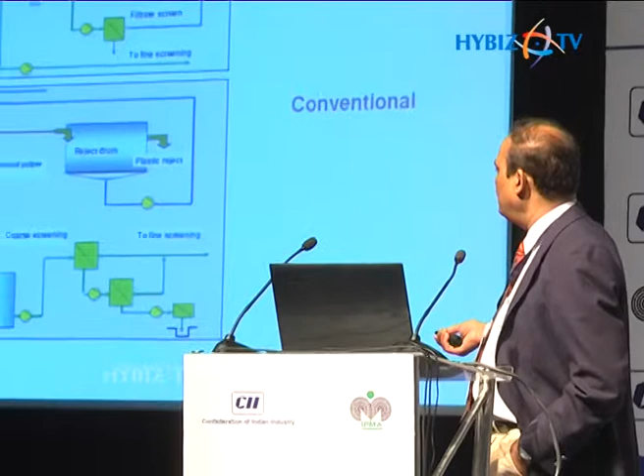The other portion, which basically contains a lot of larger size light impurities, is fed to a secondary pulper where the remaining slushing takes place. The recovered fiber is taken back to the pulper, and then the light rejects go to a reject drum for washing and fiber recovery. And the filtrate is again recycled back to the system.

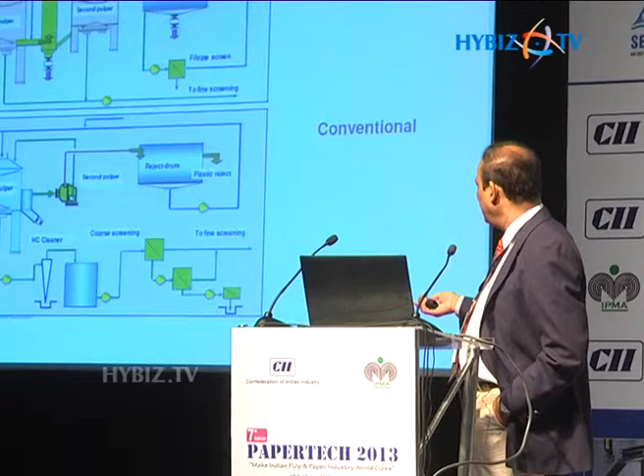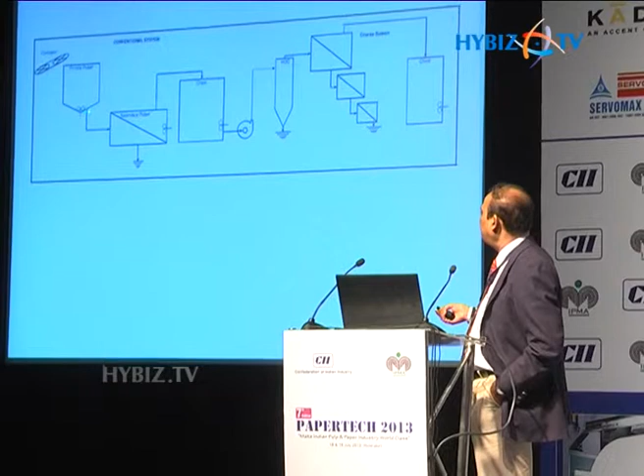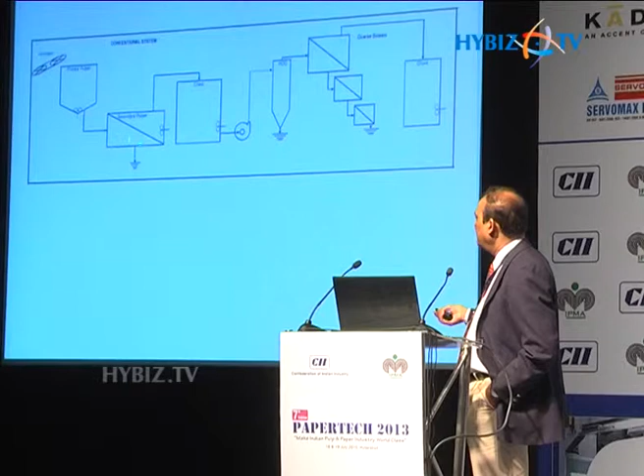Now let's look at the conventional system which is predominant, or you can say more popular, in India. This is a batch system. So you have a pulper where you carry out pulping, and then the accepts pass through a screen plate, which is generally 10 to 12 millimeter in diameter. It goes to a secondary pulper or some sort of a barrier screen, which has perforations of, I think, 5 to 7 millimeter in that range, and then heavy size plastic particles are removed here, and the accepts go to a dump chest.

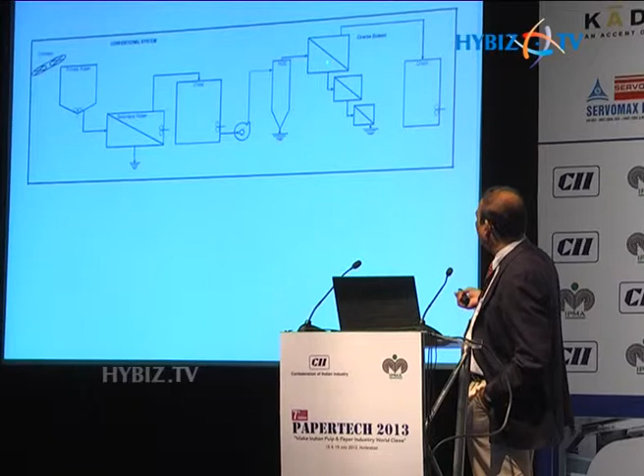From there it goes to a high density cleaner to remove heavy weight contraries, and this is followed by a 3-stage pressure screening system, which does the job of coarse screening, and then the pulp is stored in a chest before it is processed further in fine cleaning, etc.